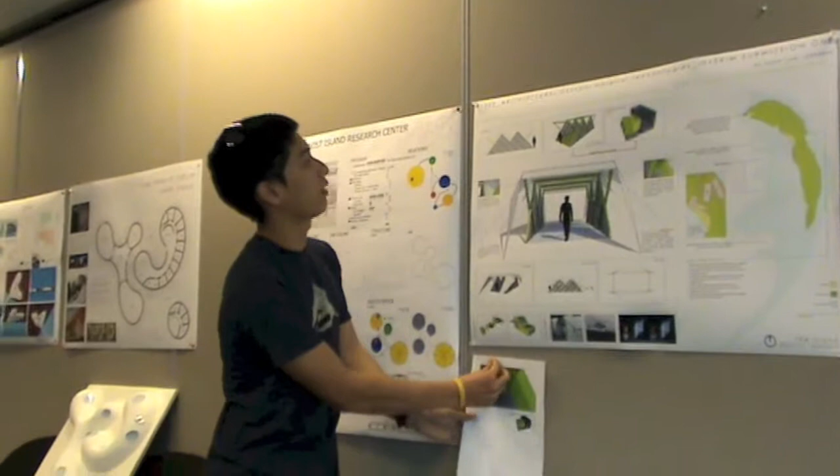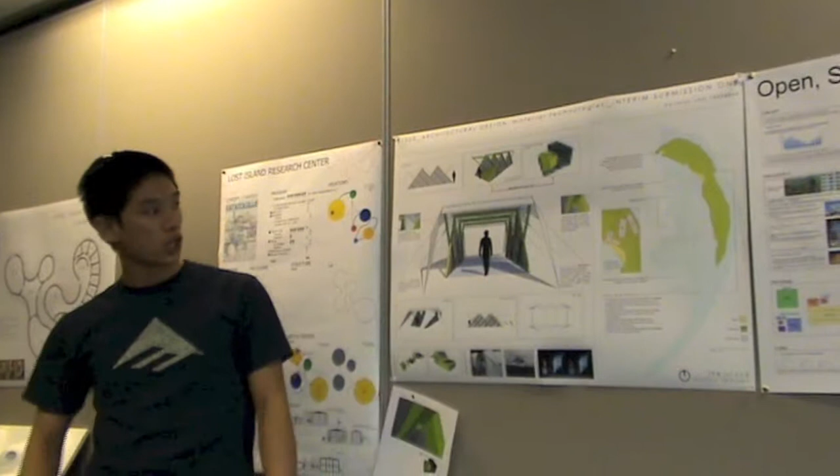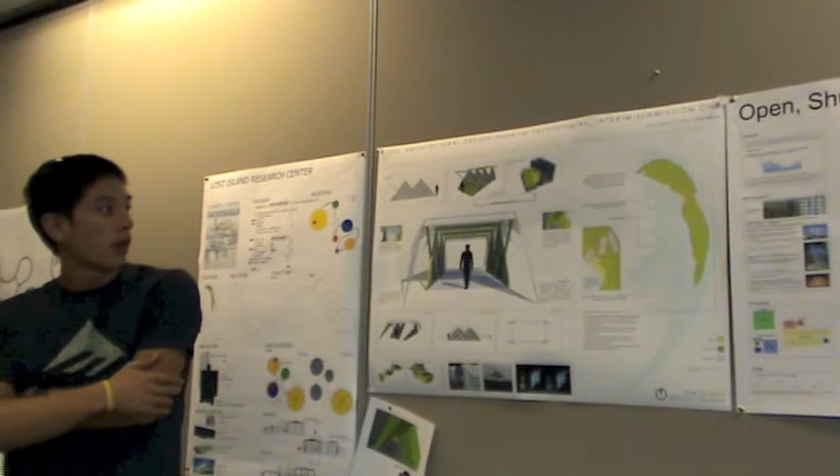So for the first drop-off zone, I split it into different drop-off zones. When everything gets carted in, it'll obviously come in a big container ship. I sited it here because it presents one of the closest areas to the building site and also to deeper water. So the big container ship will arrive and the initial occupants will come through and live in these small

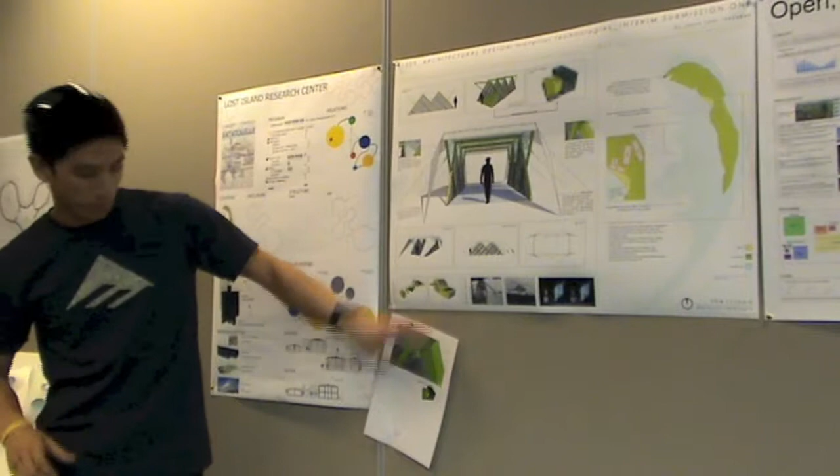self-contained, temporary structures made out of extruded panels, which have two cavities that can be filled with either sand or water depending on where the weight is needed, and also depending on transparency.

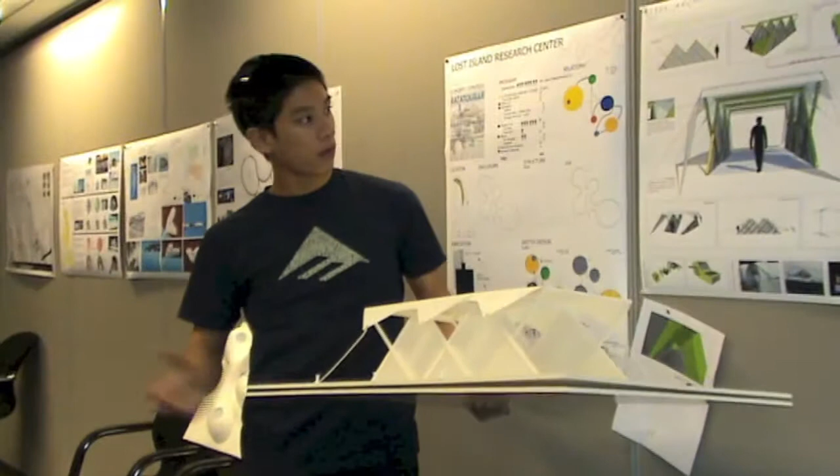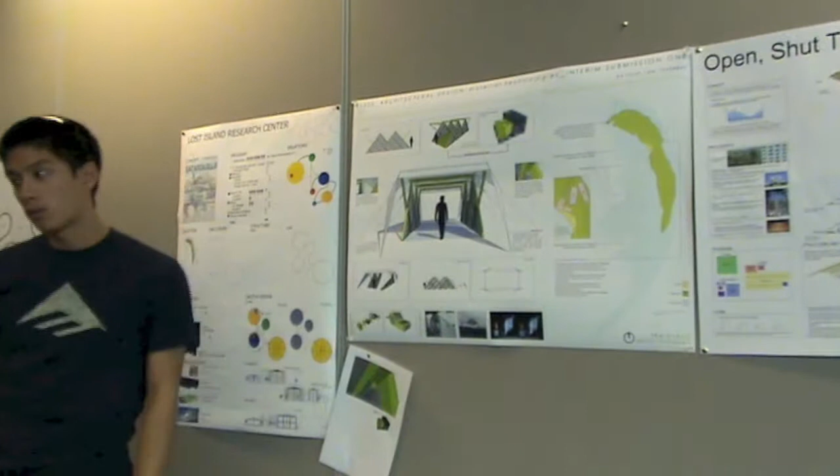That will be the first stage of the project, and then as the other buildings pop up - the factories, research station, and individual studios - those temporary structures will be disassembled and moved on and reused. Those panels used to make the small temporary structure will now be slotted into the side of the main structure. All these beams are polycarbonate

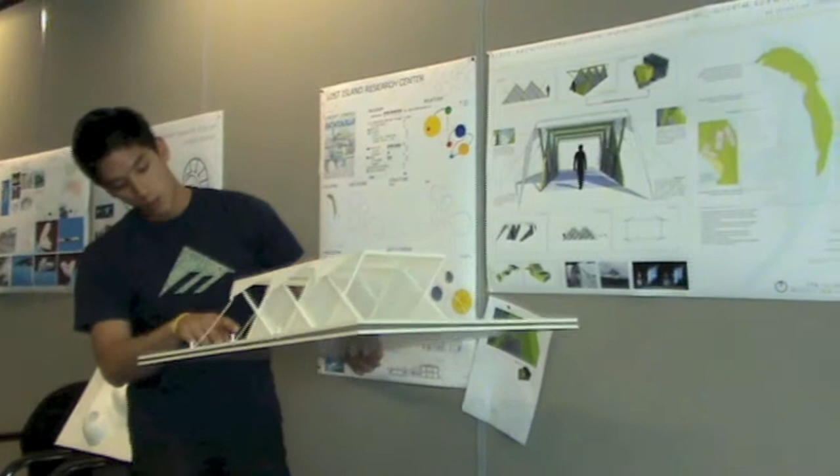and they all slot into each other. The tent structure over the top is made of a polyurethane membrane, which is breathable, windproof, and waterproof.

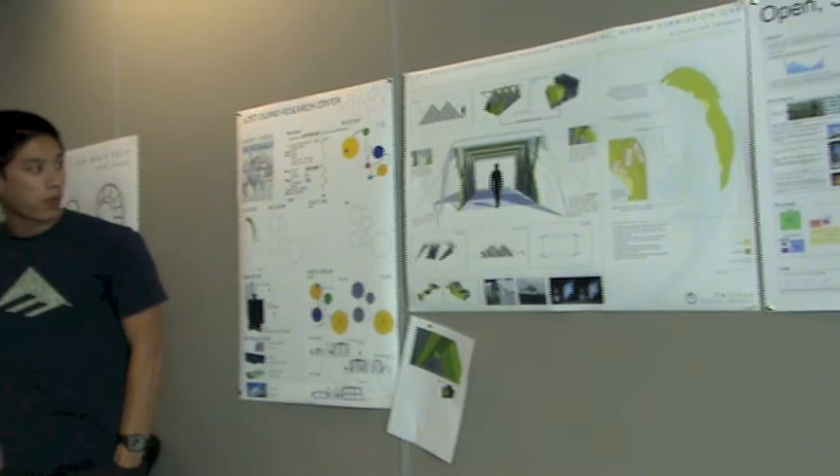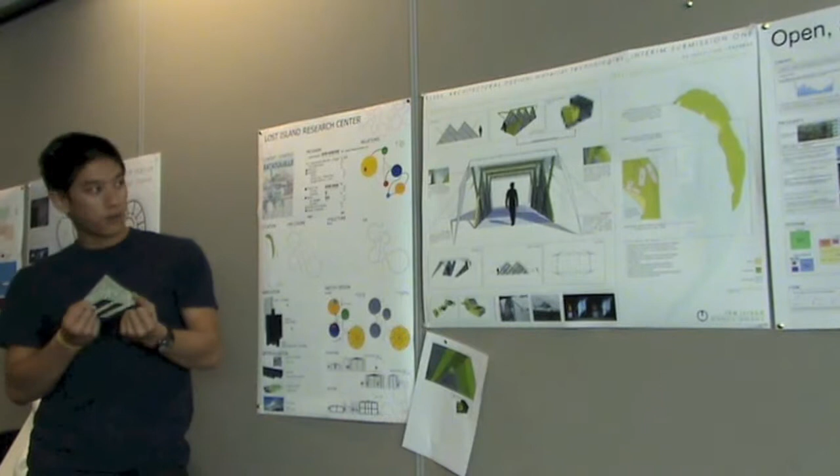The technology I looked at is one being developed at the moment, called c_change. It's pretty much primarily a polyurethane, but when there are occupants inside giving off heat, the membrane will stretch a bit to become more breathable.

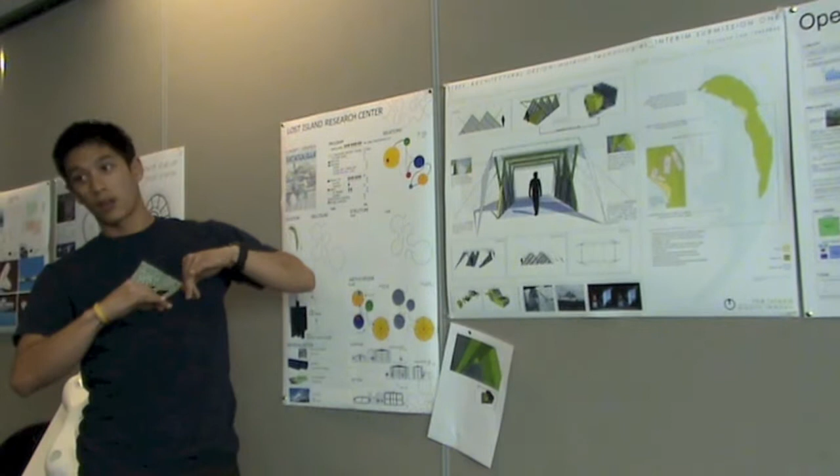And when there are fewer occupants, it closes up into a less porous structure. It hasn't been used in buildings yet, but it definitely has the potential to be used as a membrane structure.

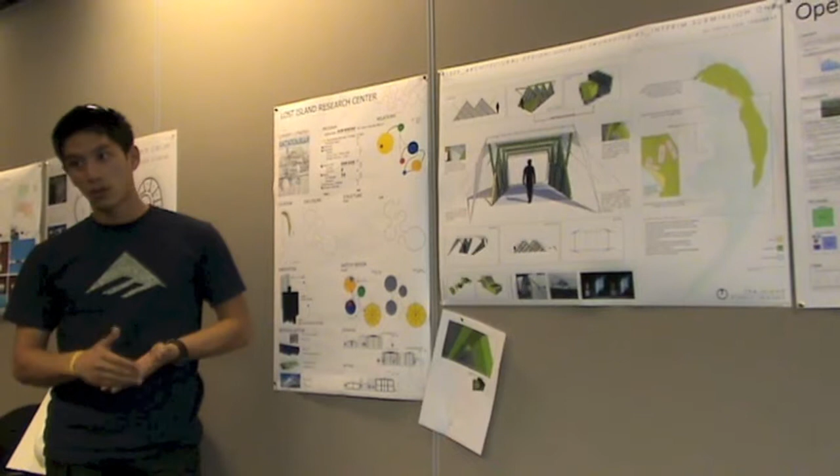At the moment the research is being used for clothing. I emailed the guy working on it, and he said the main reason it's not used for buildings yet is maybe because it's not fireproof.

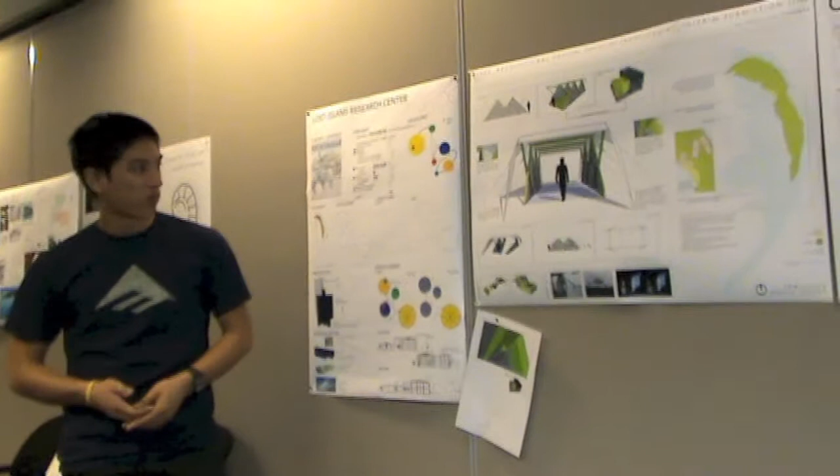But I guess you could maybe add fireproofing - it doesn't have to just be for clothing.

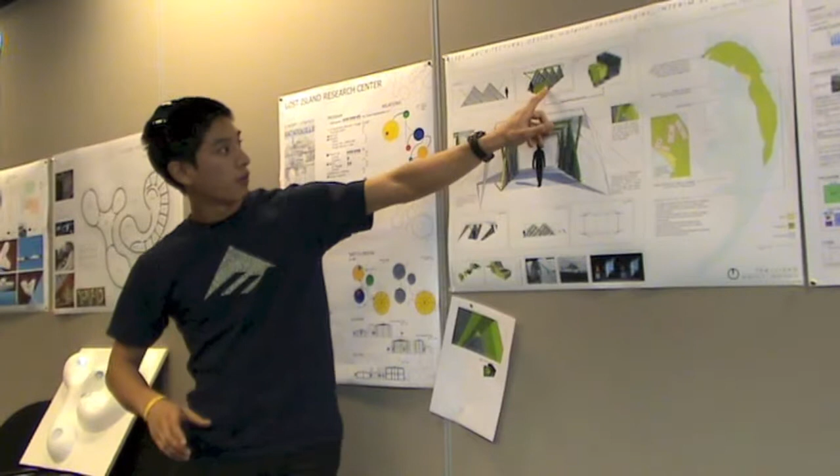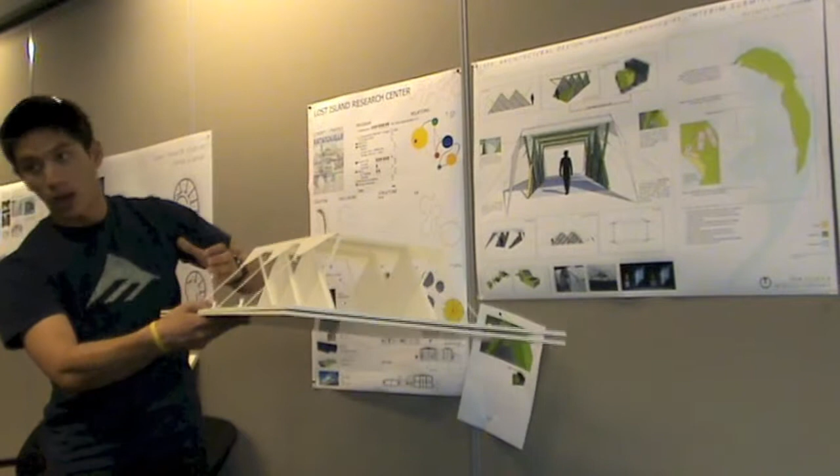This structure - the whole idea is that it can all be disassembled. They're all modular pieces, about a metre. These pieces, and the X structure, are close to a metre but can collapse out of the joint, so essentially this whole section can be taken apart and assembled by hand, without needing any extra tools.

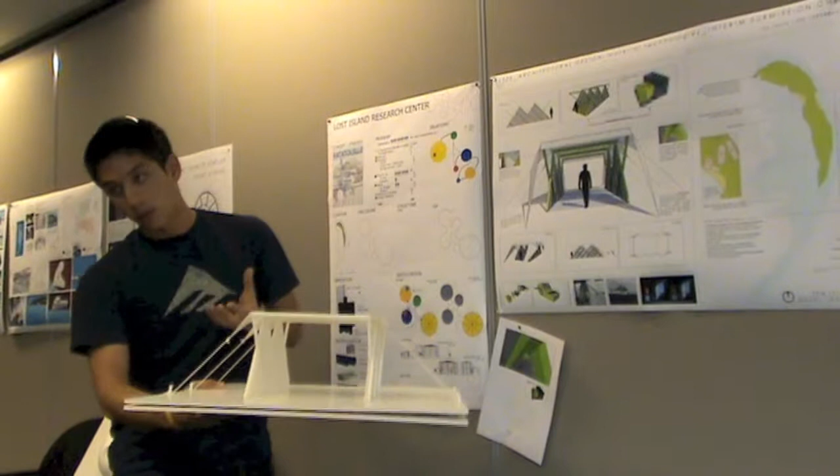They're quite light because they're polycarbonate. The heavier panels are split in two, so when they're empty and not filled with too much water, at least two people can put them up. If you add water that adds more weight - the lower ones might have sand instead.

This structure could be adapted to fit a few different building shapes and scales. You can scale it up if you need it bigger, or join two together, or put them next to each other to make them smaller or bigger.

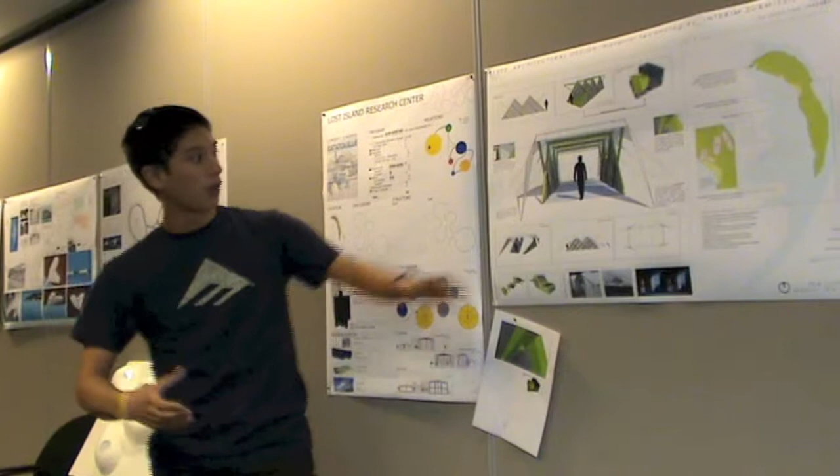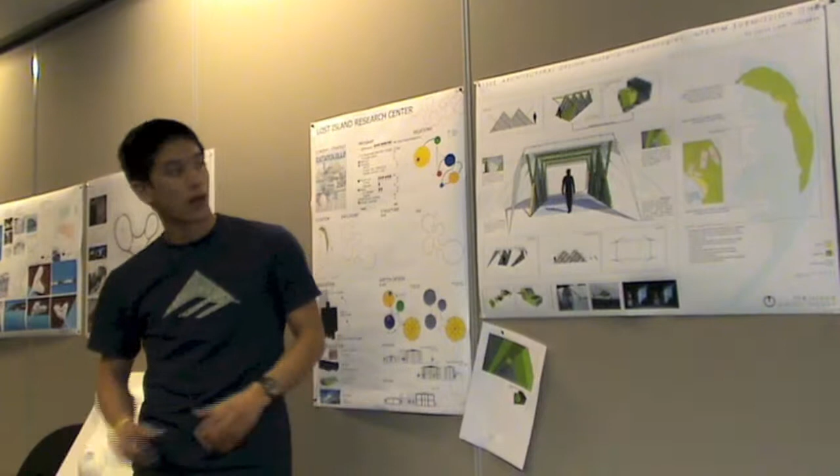For the individual studios, same idea. The studio is situated on the west side, close to the reef, with the big beach behind it as communal space, connecting all these spaces with plastic boardwalks just to lift the walking plane off the main environment so it doesn't get trashed too badly.

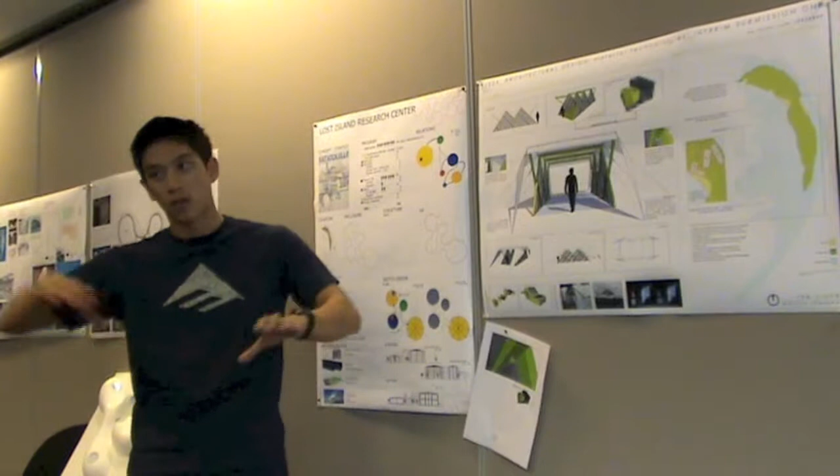E represents a composting toilet, so it's away from the main facilities - you do have to walk a bit further, but that's just because the composting toilet is quite stinky.

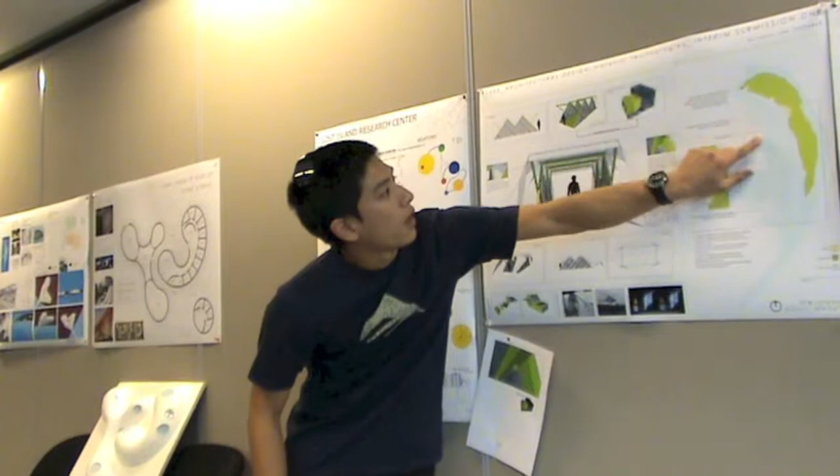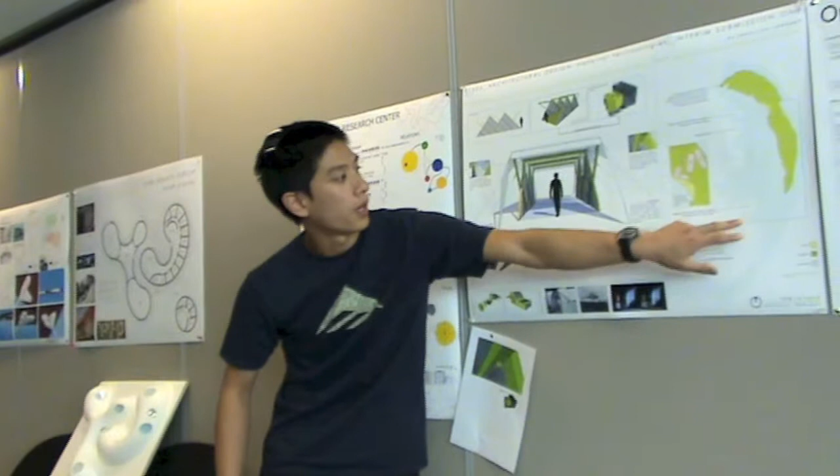I've also looked at additional points like ports. This port offers quite a close inlet into the main part of the island where all the buildings are, whereas the other subsequent bigger ports offer protection for larger vessels, like a big container ship that can stay there.

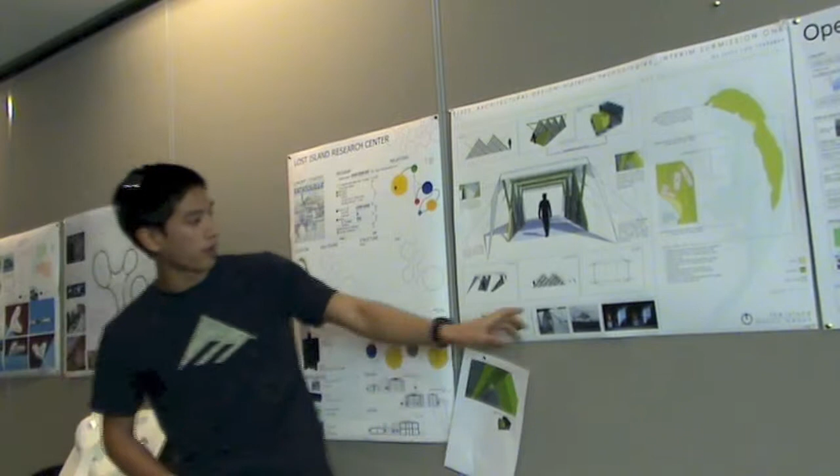I forgot to mention before, most of the crate can be dropped off by helicopter. That idea came from a friend of mine who worked down in Antarctica for a year, and that's pretty much what they did - everything's flat-packed, dropped off by helicopter, and built up from there.

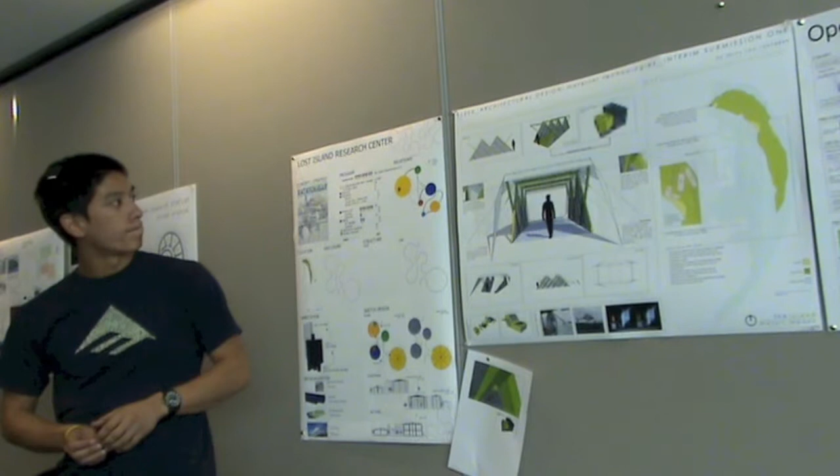The reason these flaps are pitched out is for structural stability, but also if it's pouring with rain, they can all be pulled down to close up the area.

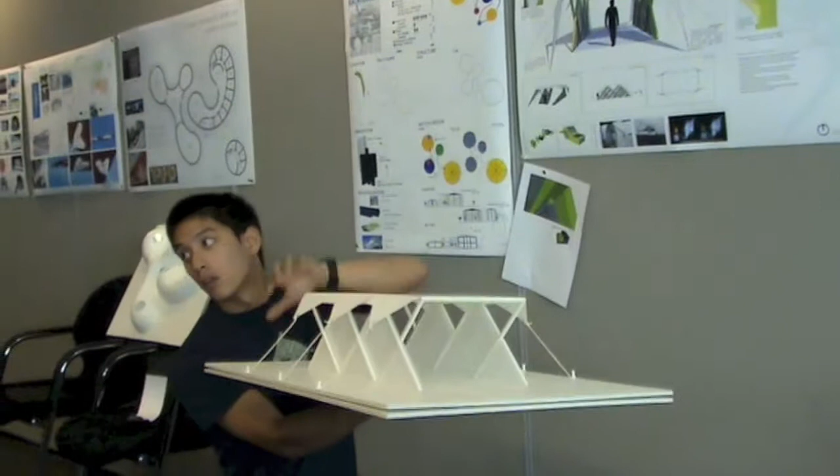In between the gaps, there'll be panels with mesh or a fly screen to stop the mosquitoes and nasty bugs - in between these big triangles.

Also, the reason they're pitched out during the day is so you can get natural ventilation straight through the building. This will be a translucent, white membrane, so you still get natural daylighting inside, meaning you're not using extra energy on lighting, just for the computers.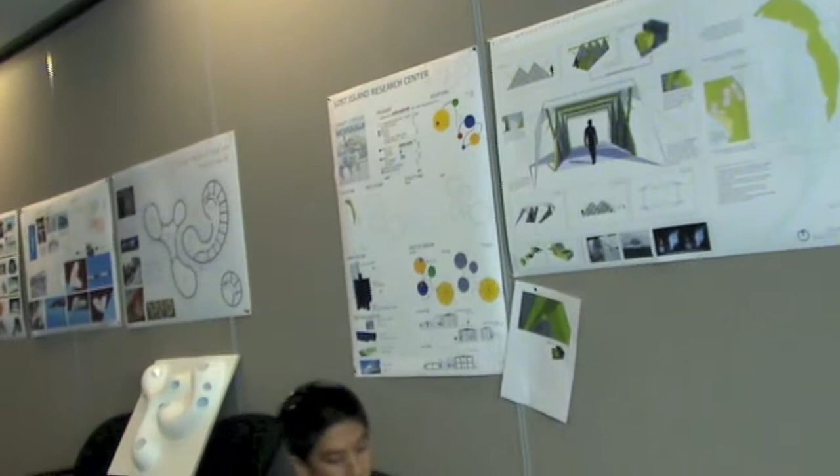Is there any membrane in it horizontal? Yes, this will be made up of three sections, and they'll all slide in about a metre. No, into this direction - no, not yet. So it's just a tension thing.

I'm not sure, I was just thinking about adding a bit - it looks very difficult. It might work, but if there's tension, if there's something down here, these will be pulled out along this axis, on that axis - you've got to stop something from scissoring this to the ground.

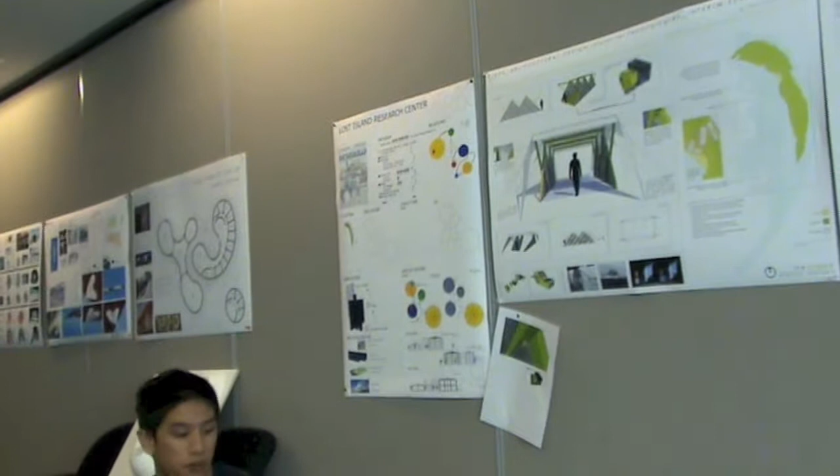So basically the big tanks have semi-rigid walls. For a component system to really work effectively, it has to be flexible. It's implied that this will work really well on a flat surface, which you don't have on the island.

This is probably the second part of my scheme - working on a structural floor that could be elevated off the ground, with the walkways you're alluding to, and they might connect to a big platform.